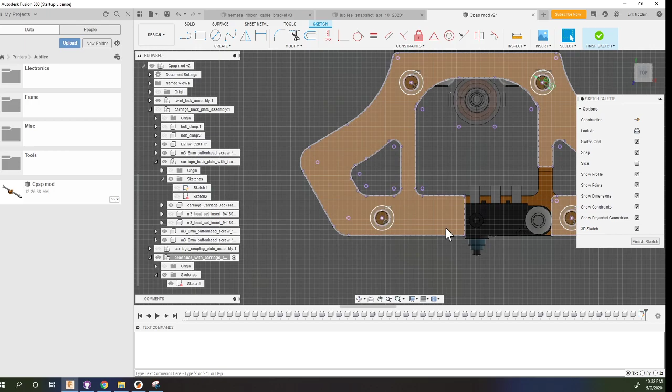Okay. Going to modify Carriage here for heat set inserts. It'll make iterating on this design in the future easier and quicker, since we won't be threading into plastic anymore.

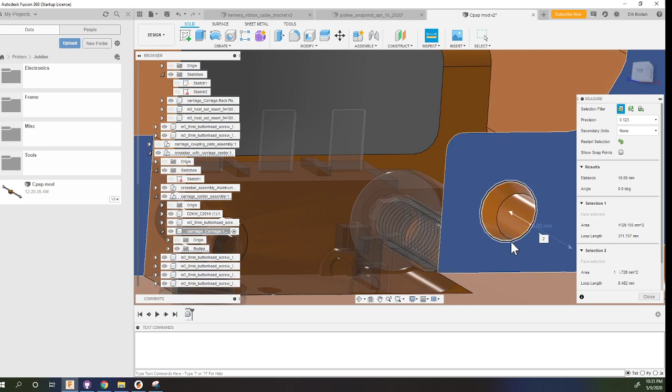I need to quickly locate my calipers. Alright, 3.8. So why don't we make it 4.5? What the heck? Ten millimeters.

You know what? Just for giggles, let's try something different.

Hello, I'm back. Welcome back to this week's tutorial on how to suck at Fusion 360. Oh, well, all right then. I'm just kidding. Yeah. Oh. Okay. Anywho. Oh. Okay. A bunch of them coming out now. So apparently somebody woke up and decided they wanted to come out.

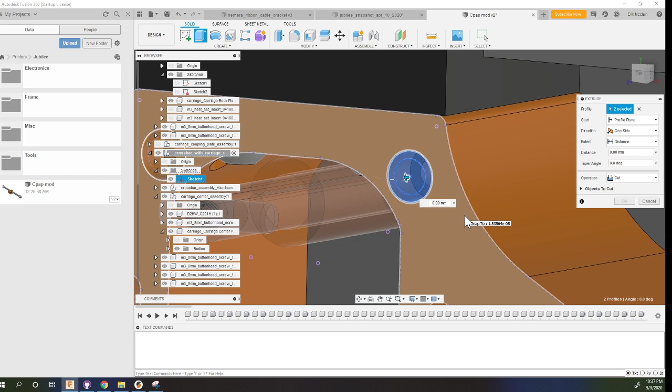All right. I am getting ready to wire up Hemera number 2 into the tool mount. But

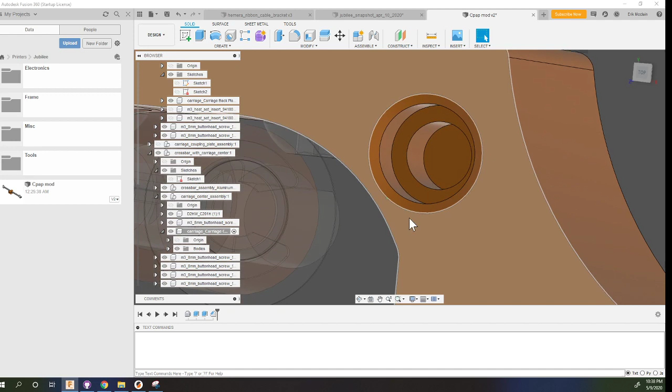Level. Okay. Okay. Okay. This thing wired up. Hmm. Oh well.

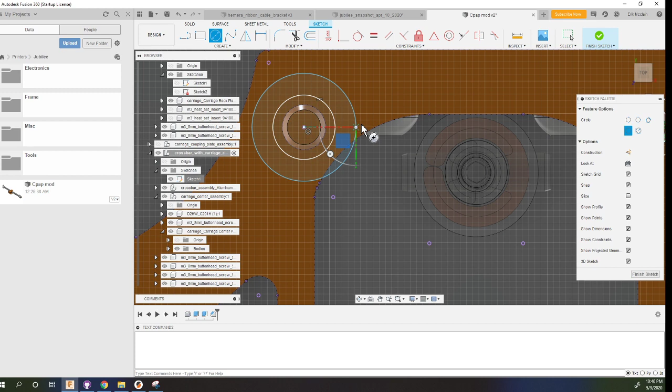Really, Decker? You know where I'm at. You were just here.

I need to make this a little bit thicker. Maybe, maybe not. We'll find out. Either that or I have to get shorter screws. What?

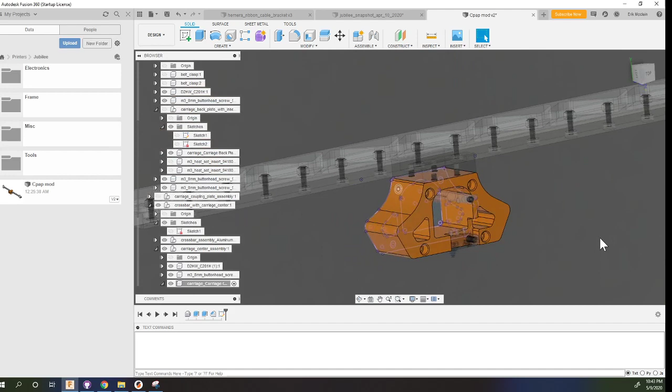So I've adjusted it so that it takes the nylon tie wrap. And I'll throw a picture in real quick just so you can see what I'm talking about. Well, I think I got it from your old one, and I did just an extension straight off the thing, and I put some insets into it for tie wraps. You'd also posted another picture of it a day or so ago. Yeah, I've been iterating. You don't need to post a picture. It was just a curiosity question. You're continuing to iterate that.

That's what I thought. But I've also had a successful installation of an RJ45 adapter to the toolboard distribution. And I have a functioning toolboard attached to it. So toolboard's already set up, configured, ready to go, and I'm currently wiring up the Hemera. So before I wired up, I wanted to get a toolboard adapter plate that was going to operate properly.

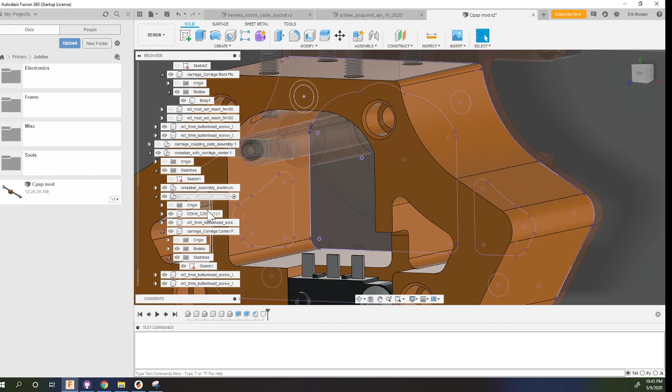And like I said, I'm using the 36-inch long nylon tie wraps that you can get at Home Depot. Yeah, that's what I was using as well, because they do a good job of being flat. They do a good job of flexing the right way and resisting flexing sideways. And they seem to work really well. They're ones that are for like air conditioning ducts. Yep, but they've still got enough side to side that you can move over the working area. So yeah, that's what I've got in all of mine.

And I saw what you were doing in some places to tie it down, and what I've ended up doing, which may or may not be where you want to go in the long run, I've just done this in a couple of places, is I have boxes of servo mounting screws because I do a bunch of radio control stuff, and I rarely use the screws. And so I drilled a hole through the strap and the thing behind it and stuck one servo screw in it.

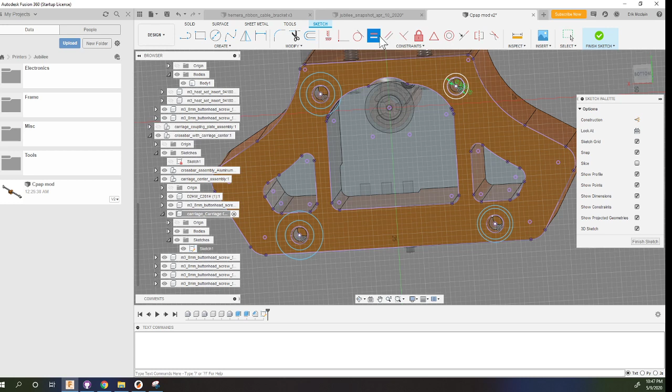Yeah, what I've done in the latest edition, hopefully I didn't get that too far off. Okay. Now I can actually move forward without using the drill anymore. So I set up a set of holes in the adapter plate, and then I went to the clearance hole size on the nylon strap, and then I put a set of screws in that go through and thread into the back of the plate. So you're not threading the nylon strap. Right.

And mostly because I wanted to be able to remove it without having to mess with it. Yeah, and you know what I did is kind of a quick and dirty version of what you're talking about, because I drilled a constant size hole through both of them. But it is true that almost all those servo screws are not threaded right up around the head, and they are threaded down at the tip, and so it kind of works out to be the same. There's no threads biting the strap.

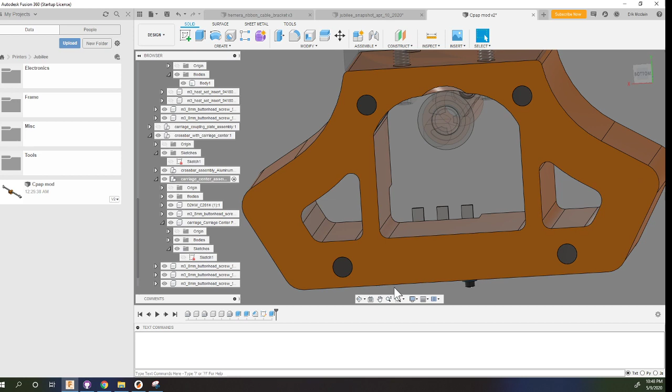Yeah, and like I said, it's not a long term. It's just kind of a quick and dirty. If we're going to design it in, it can be improved a little. But I will say it is extremely effective. So designing something in seems worthwhile. Yeah, and I think the most recent iteration, I'm going to need to add another millimeter of thickness to it, perhaps.

But... dropped the wrench again.

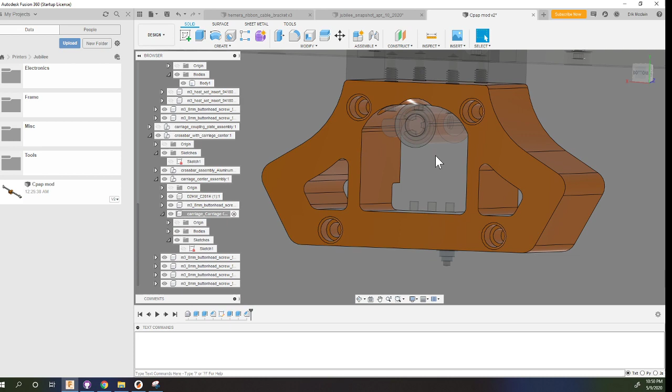And if you look closely at the picture, you can see that I'm using a full pair, wire 1-2 and wire 7-8 as the hot and ground, or the positive and negative DC power, which ultimately ends up effectively being the heater and the rest of its trivia. Yeah, and so by pairing those, you've got plenty. In other words, you're kind of using those RJ45s the same way people are using CAN boards. Yep. That's very elegant, especially with a flex cable in there. That's really quite good, actually.

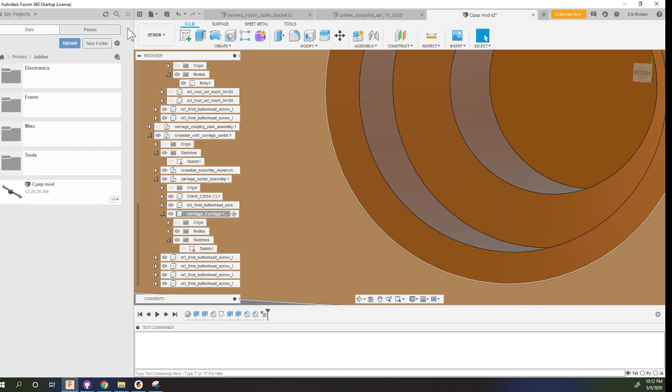And I've got color-coded cables. But I'm gonna probably sleeve. I may not have to sleeve them, because that's the only wire that goes between that and the tool board. I've got some smaller breakout PCBs. The second picture shows another one that goes off to the tool board, and as far as the Jubilee is concerned, that tool board is ready to go, configured. I just have to wire it up. Of course, I don't have another 12-volt blower fan, so that's on order.

Yeah, I actually found a couple in a box when I was reorganizing some stuff and went, oh, look! I was quite excited, I went, oh, I know where these are going to go. Yeah, that looks really nice. I found the pictures a minute ago, and that works out quite elegantly.

And then the latest one I just picked, I'm just test fitting that, but that strap is there now. And it's got two screws on it. Like I said, I need to thicken it up a little bit, but because the screws go all the way through, I could stick a nut on the back if I was concerned about it. Are they going into plastic or heat sets? They're going into plastic. Okay.

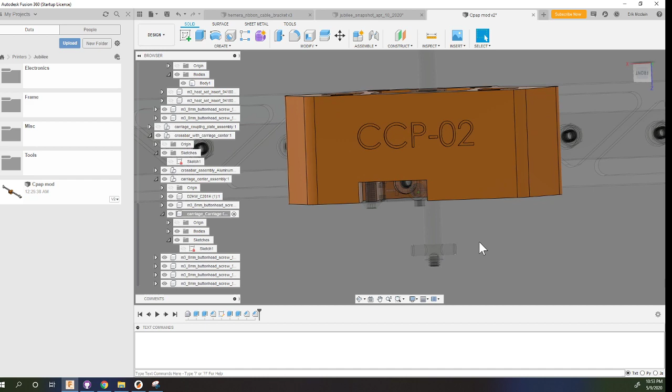Let me give you a cross section on it, just to give you an idea. Yeah, that's fine. A lot of these questions are curiosity. Oh no, I know, this is part of the collaborative process. I am trying to get a cross section. It doesn't want to stand up. There we go. How's that? Yeah, that's fantastic.

So the screws, I don't remember if they're M5s, M6s or M8s. I think they're 6 millimeters. Yeah, they look like 6s. So between the previous version and this version, I like this version better because it's actually smaller and lighter. Yeah, and it is looking pretty nice, it's getting there. Like I say, I just grafted a thing on top to get going, but I'll probably reprint with this.

I've already swapped mine out a couple of times, and it's not that hard to undo everything and swap out that plate. I'm just trying to get the tool board on the plate and get the hot end on the plate so that once it's there, then I can get my wire lengths somewhat close. And I think I'm probably not too far off from having a process that means I can build a tool pretty quickly.

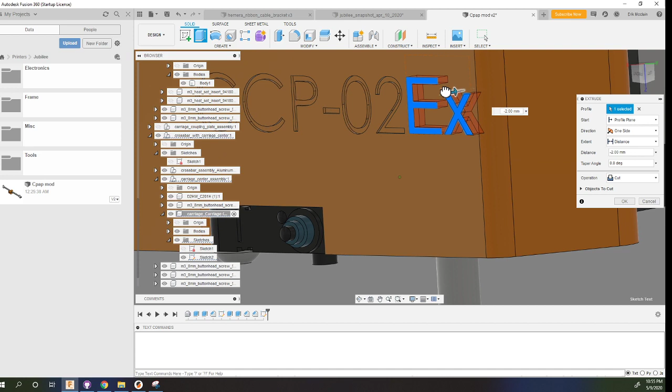You know, it is interesting having the tool board mounted on kind of sort of the top back, or instead of using the words front and back, the kinematic locking side of the whole thing. That does mean it's pointed into the body of the printer, and when another tool passes nearby, you have a collision, say, between a BMG that was done without a tool board and one of these, you actually can hit the tool board. Now, I haven't damaged anything yet. If you drive a tool into the back of another tool, essentially, into the lock side of the tool.

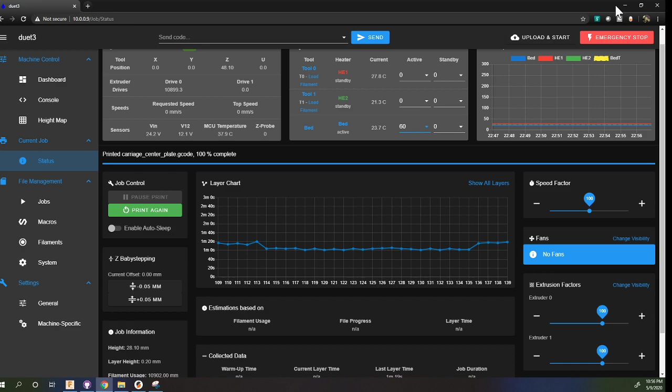So I've been playing around with what we discussed of having the axis limits set one way via the tool macros when you're parking and unparking, and have them set another way to help avoid that whole thing, so the tool macros can at the correct points set it this way, set it back the other way, etc. I made an interesting discovery that makes sense in retrospect, but I just didn't realize it. Axis limits are in machine coordinates, not offsets.

Yes. So your tool macros might or might not contain G53s, and they might do other things. But the Y limit that you put in the axis limit looks really odd as compared to everything else you're doing because it's in machine. And again, I understand why. It's the way it works, and it's appropriate. But that's part of the way I crammed some stuff together, was working all that out. I got it. Okay.

So the other thing, oh great. Okay. Well, that was an interesting discovery. I'm going to need to move one of the screws because the way it's set up is you have to put the strap on before you put the tool board on. Oh yeah, because the screw is in the wrong spot. It's below. It's inaccessible when it's all mounted. The bottom one. Yeah, it's okay. Not necessarily a bad thing.

No, in fact, I was sort of wondering, looking at some of your other pictures, if you could run one screw that you could get to and kind of make a chamber down at the bottom for the tip of the nylon strap to plug into. Yeah, I've actually had somewhat success in that area, and that turned out to be mostly because I was running into issues with bridging and causing troubles that way. So sometimes it works and sometimes it doesn't.

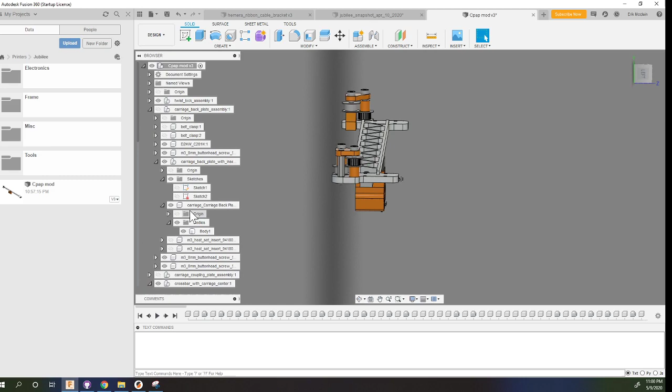And then the upper two holes, there's the middle hole. The middle hole of the starfish guide goes into the top hole on the Hemera mount. Yeah, because I've got a triangular. I figured the triangular would give you some flexibility, right?

So the middle hole of the adapter plate goes into the top hole of the Hemera mount, and then the bottom two go all the way through the standoff and then into the heat set inserts. So the Hemera mount has 3 more heat set inserts at the top in a triangular pattern.

I'm gonna try to stop dropping. Every time I try to pick it up, I drop the Allen wrench, and it doesn't hit the table. It goes all the way to the floor. Oh yeah, they're very good at that. Allen wrenches are quite talented. Yeah. So how was your day?

My day was actually one of the best I've had in a long time. I have an aircraft that I own grounded due to a cracked canopy, and I have just absolutely not been able to get to it to fix it for weeks and weeks. And I spent most of the day with that canopy and a padded jig, very carefully trimming it to the final position, and I believe it's ready to glue into place tomorrow.

So now it is about 2/3 masked off for the trimmer, and I ran out of daylight and patience at about the same time, so that's fine. I can finish the masking in the morning. That is a very finicky, meticulous part of that. Oh yeah, if you want it to look good. Of course. And so, like I say, I've been putting that off to do other people's aircraft and the day job and keep the family happy and all of those kind of things. And so it was very luxurious to do. Sounds like a win for the day.

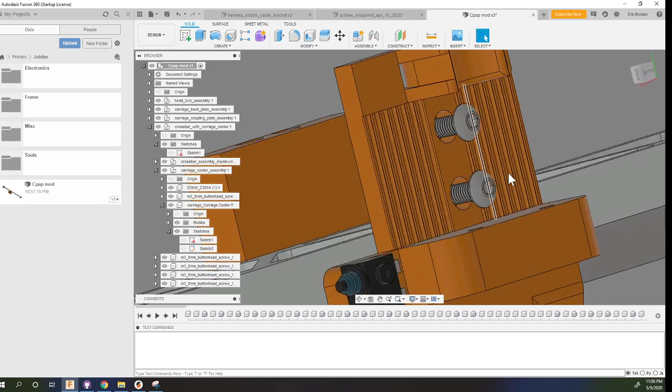And I kept challenging myself on how much current we're actually going to get on the tool board power leads. Yeah, a 40-watt heater plus some other trivial uses, and if you're running 24 volts, a 40-watt heater is 1.4 amps, something like that. Yeah, somewhere in that ballpark anyway. And so if you're super conservative and you double everything, that's still well within what you're doing with those pairs. Especially over those short distances.

The really amazing thing to me is if you look up those tables and then you actually do the math for 2 meters or 1 meter instead of, you know, those tables assume thousands of feet and their general recommendations. And if you truly do the math, it's amazing what you can do. Well, for example, if you go to the McMaster-Carr site and you look at the ratings for their 7-strand 300 volt 24 gauge wire, it's listed at 7 amps.

Yeah, exactly. And you calculate IR voltage drop over a meter, and you go, oh, well, okay. That's easy. And what kind of heating are you going to get? And they're basing it on 86 degrees and things like that. It's like, all right, not a big deal. We're good. So I'm not worried about overcurrent in the Ethernet cable. And if it starts to show some wear or breakdown, or higher resistance, you can replace the 88 cent cable. That's an assembly that's already made up by somebody else. Yeah.

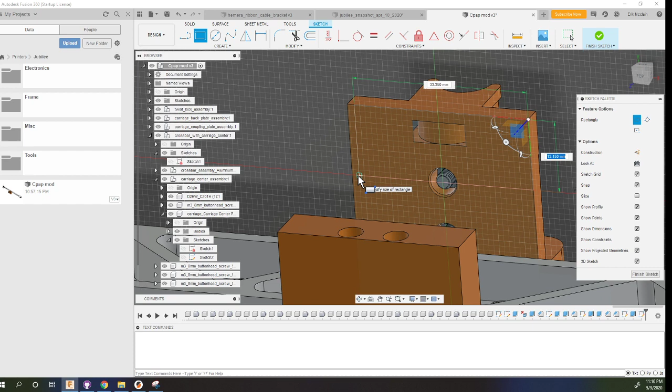Hey, gentlemen. Hey. Oh, quick, we gotta go. Yep. Run. Hi, Steve. How are you? Oh, tired. Didn't get to build as much on the printer today as I wanted. Just looked at a couple of the parts that I had printed and didn't like their quality, so I reprinted them. One of those things where I'm like, well, I'm going to have to redo it, so why not do it better? One of these things is not like the other.

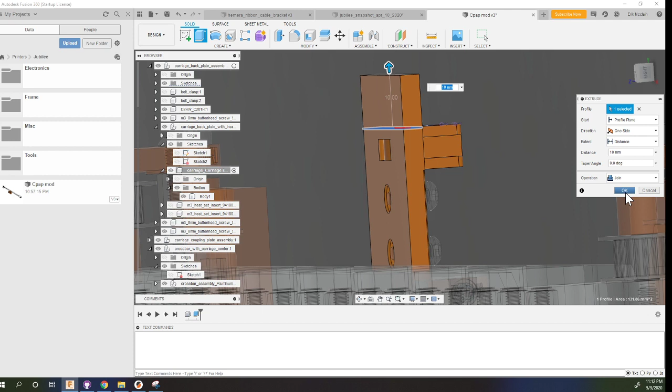By the way, any idea why Josh made, on the new motor plates, the LMS 04 and RMS 04, that hole conical? Are you talking about holes where the heat sets go, or something else? Yeah, there's a heat set that's on one side, and then there's a set screw that goes on the other. Right. Okay, so he made it conical so that it's easier to clean out the push-through plastic.

Okay, I am missing a screw from my Hemera. Are you missing one of the square nuts? Is it anything else you can replace? Yeah, no, and square nuts I have because I've got a bag of 100. The ones that I have in a bag of 100 don't fit. The ones on the Hemeras are very thin. The ones I bought were thick. Thin nuts.

I don't know if I'm missing it or they just changed which screw was provided. It's the screw for the heater clamp, and I think they just changed the screw that was provided. Heater clamp. Yes, got it. It would be a black oxide. Yeah, the last Hemera I had was a stainless. This one's not, they switched, or at least the ones I have. In fact, I have a kit from a Hemera dumped on the table right next to me, and it's black oxide mushroom head. Button head, yeah. Thank you. And that's what I've got. So I'm good. And I think that may have varied over time, because I've got some fairly early ones and they have black oxide.

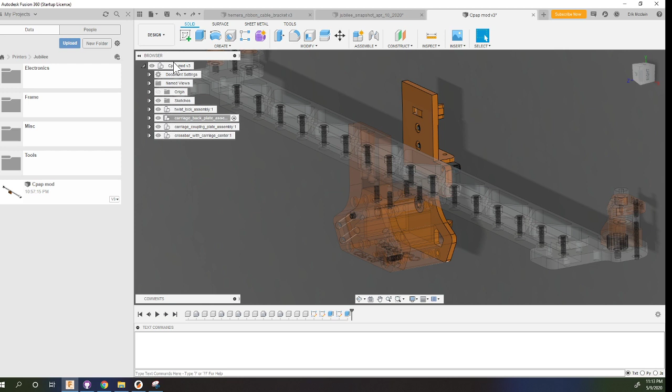So I did make an initial run of TAMV earlier today. And I identified, not a problem, just it couldn't find the circle. And it couldn't find the circle because of, and I don't know if this is the reason or not, but this is what I'm going to assume the reason is: my nozzle wasn't completely empty. The picture was clear and focused, and the bottom of the nozzle was dead nuts in focus, right? At least according to my eyes. Let's put it that way.

But what I saw is that it's like no circle found. It's like, what do you mean no circle found? It's right there. And then I look at it again, and it's like, oh, I've got yellow filament that's clean but flushed in the nozzle. So it's not a black hole. So I need to heat it up and then do a retract on it.

Well, I was going to say, heat it up, rub it with a paper towel while it's hot, in addition to retracting it. I will be the first one to say that the circle recognizer is a little bit finicky, and it sounds like kind of a pain in the butt to clean the nozzles and get the lighting and do this and do that. Yeah, but you only do it every so often, right? Right. You do it very infrequently, and it works so well. Well worth the effort. It is just astonishing.

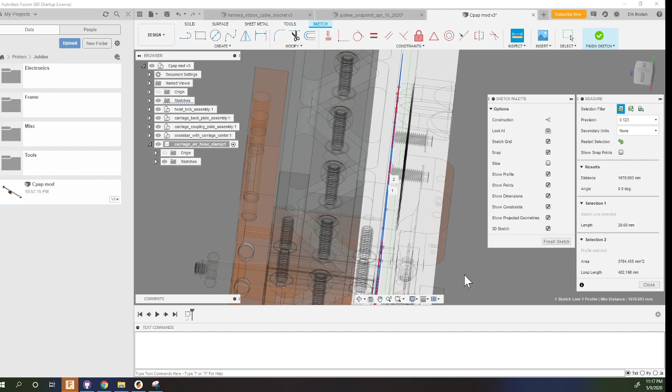Thanks, Phil. No, this is one where it was shipped from Amazon completely assembled. But Amazon just threw it in a box, threw about 6 feet of brown paper on top of it, and shipped it. And in the box was another Ender 3 Pro, in its original packaging. You saw how mine was. Go ahead and put it together. I think you might be surprised on how well it went.

I haven't. I was going to, but then Lauren was like, "No, you've spent enough time on the Ender already. You want to work on your Jubilee? Why don't you work on your Jubilee?" So I'm like, "Yeah, that makes sense." You haven't spent enough time with me.

The one Ender 3 is pretty damn good. I will say this: I know what that person was fighting, and if I didn't know as much of what I was doing as I do, for somebody who's new, it would have been infuriating. Yeah, some of them can be very frustrating. Basically, the bed is slightly tacoed, right? It's lower in the middle and higher on the sides. Which is the exact opposite of Ohio.

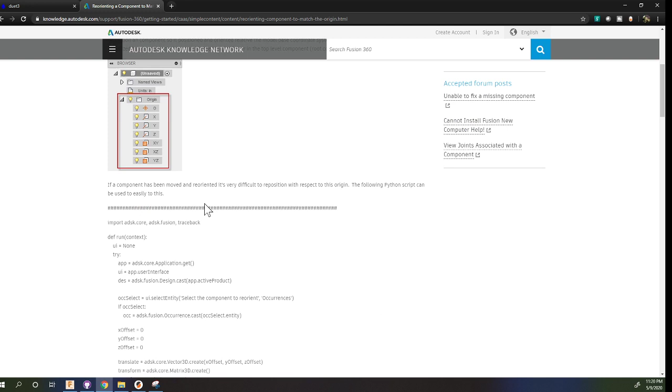Robotics and all those guys, it's heavy. Because they don't actually replace your bed. What they do is they add a bar that crosses two of the mount points of the plate, and then you've basically just got a screw that you're moving up and down on the assembly on that side. So you're not really decoupling anything. That is the downside to their design, because you've really just bolted something on to 2 other screws, and you're now adjusting them with a single thing. But since it can pivot on that center point, it does make leveling a lot easier. Well, you're doing 3-point leveling, so that's a thing. Woo, got the screws in.

That's a pain. I just wish any printer that somebody bothers to make where you don't have auto bed leveling, they need to take one of 2 approaches. You go the route that Prusa went with the Mark III, and that is you bolt the damn thing down, right?

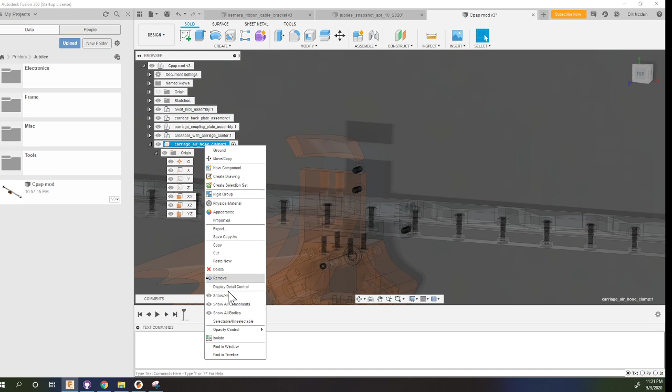You put 9 bolts in it and you bolt it to something heavier than the plate is. Ta-da, done. You've minimized warp, right? Yep. And then in the Prusa case, it works really well because, hey, bed leveling, and not just bed leveling, but skew detection and all the other stuff they've got going on. So that's great, right? Or you go dead nuts simple and say, oh, look, 3 points describes a plane. Oh, hey, 3-point leveling, done.

Like, apparently not in some people's head. It is astonishing how many people think 4 points. Oh yeah, I've had so many people be like, oh yeah, I had this printer and it had this crappy 3-point leveling thing, and I'm like, no, that's the way it's supposed to be. Yeah, that's the easier way. Yeah, exactly. I mean, that's the good way. But lots and lots of people look at that and go, no, whatever.

Toolboard, wiring diagram. Thank you very much. Open it up. So, and I was correct. Josh has not published the assembly plans yet for the corner double pulley plates for the metal plates. Okay. But in the conversation I've had with him, he said basically it's the same exact instructions as the regular double corner pulley plates, with the new metal plates and the longer screws. Right. And so I asked him, is the pulley assembly the same, and it's just the bolts that go through the plates that are longer? And he said yes.

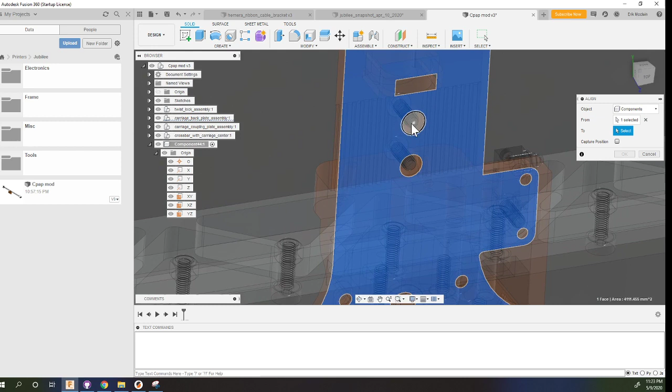So I'm getting the bolt length off of him now, and that will let me actually start assembling them. So when you say it's the same, are you referring to the stack up of all the shims and everything? Yeah, the stack up of all the shims and all that stuff are the same. Yeah, I had seen some reference to that. I have some metal plates sitting here. I haven't put them in yet. But I was planning on putting them on and then playing around with shims. In the long run, it's better to have a guide and get it exact. Yeah. But you can also sight down the belt inside and say, okay, that's going to work.

And then on the right motor plate, the L-shaped spacer that goes underneath. Yeah, that was required. My old ones didn't come out as good as the new ones that I just printed did, except for the little specks of black filament that I'm now getting in some of my prints, because there's black filament in the nozzle that isn't coming out, which is driving me crazy because I've run probably 3 hours of print through it.

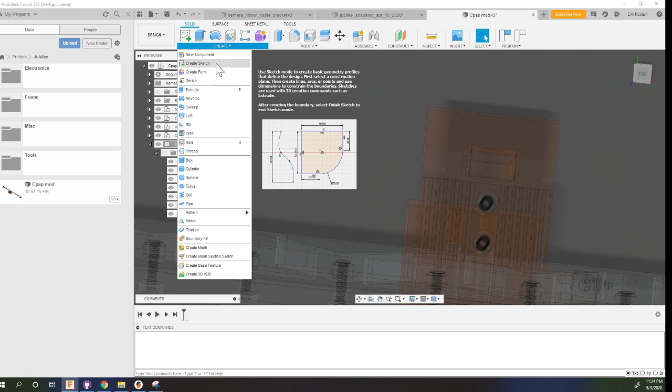Yeah, no, it'll come out for several months. You know, it generates it. It's cloning itself in there.

It's carbon. But the thing that is slightly annoying is he switched the switch on the right motor spacer. Remember in 1.0 he used one switch, then he switched it in 2.0, and now in this he switched it back to the original switch. Yeah, I think it was a sourcing issue. He's trying to get it where either one will work. Actually, his thing was that the old one wasn't thick enough. The plate had to be thicker, otherwise the switch had to be shorter. And so, since with the new motor plates that plate is thicker, he's like, now I can put the switch there and I can just use one switch.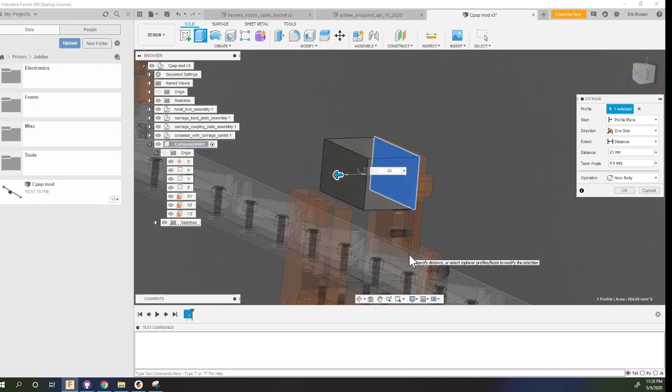Yeah. But it means that I have to go back and remake my cable assemblies. Yeah. My cable assemblies are a wreck until this thing is actually functioning, and then they get rebuilt. No, I'm serious. It's because we don't have actual wiring. The wiring harnesses and the guidance of the wiring that Josh provided doesn't work. If you looked at the back of my machine, I have that socket right next to the locking mechanism. So I've got a 6-pin connector that goes from where the locking mechanism is over to the carriage, and that's got my Y and my X end stops as well as my front carriage plate sensor.

What is Erik working on? He is working on an adjustment to. Actually, why don't I just shut up and let Erik tell us? I suddenly turned on the stream and I'm like, oh look, he's doing something in CAD. So I'm modifying these 3 plates. And what I want to do here is create a central cooling system.

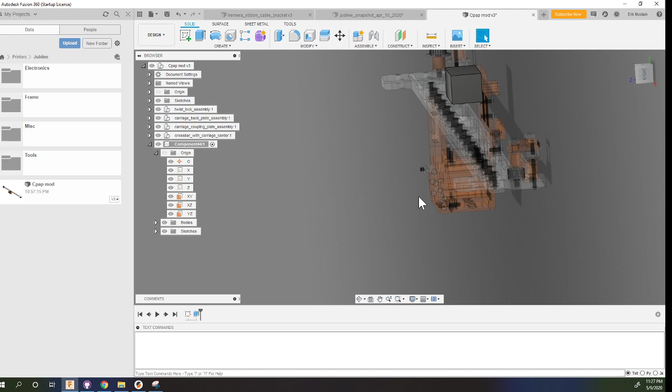So basically a CPAP hose will kind of plug in where you see the gray block. And then there'll be some sort of ducting that'll go along the plate on this side, and then that will connect up to the tools when you go to pick them up.

So basically what I'm trying to do right now, I really just want to rough out, like I want to try to get the back and front plate of the carriage assembly modified. Yeah. To an extent that I won't have to change it again when I go to finalize the CPAP stuff. So right now I'm just going to try to rough out how the CPAP stuff's going to come in.

And then I'm trying to make it so that the guys that put the electronics boards on the back aren't going to hate me if they want to modify this, namely Brian. Or want to change theirs to this. So I have to change my carriage around because... Oh, really? Huh? Well, you're gonna have to add room in, right?

Well, no. Basically, all I've really done here is I've extended this plate up, and I've extended this plate up, and this is just kind of here. So this is just kind of temporary. I haven't finalized anything, but basically I move this up, and eventually this is going to bolt together so that it'll be attached on the top and the bottom, and then that should make these plates more rigid. And I think that'll be better for the machine anyway.

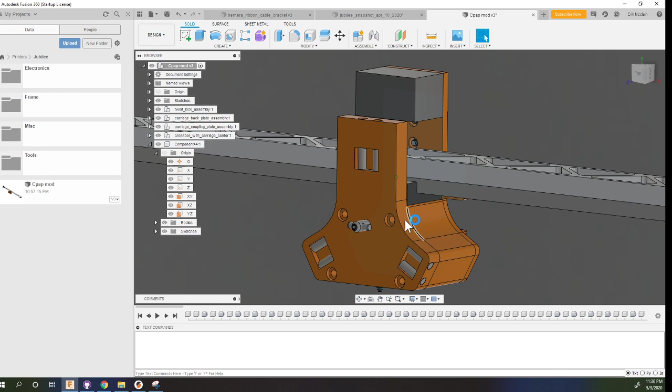But that's just me. So where's your air passage gonna be? Is kind of my question. Well, so the hose is gonna come in here, and then there'll be some sort of chamber, and then the chambers will probably come down here on the sides of the plate, as low as I can get them, and then connect up to something on the tools. I don't know at the moment because I'm still working that out.

My thought was, if you come out the side, basically, and build a chamber that goes down to where the tool lock is, you can literally just put a hole in the plate near the tool changer. Below it. And below the twist lock. Yeah, some of that is stuff I've thought about, but there are some issues there. First off, you would have to make this all sealed somehow.

And then, Daniel, are you watching the stream right now? Did he disappear? Well, I don't know where his BL Touch comes through. Oh, yeah. I would like to make it so that he doesn't ruin his BL Touch, but yeah, if we use this as an air chamber, I might be able to section off the chamber so that... Right.

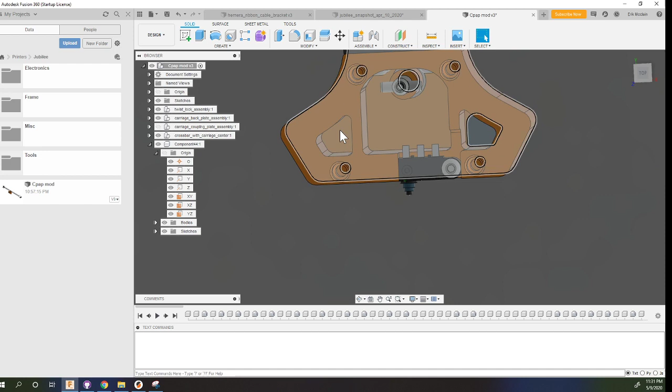Or you do it on the side. You do it on the wing where that hollow space is now. Right. Wiring runs through this side. Okay. And I don't want to make the air flow too small. Both sides, though, right? Right. So if I kind of hollowed this area out and made a wall, and then left the wires over here, and I think the BL Touch comes in on this side. Then I think we'll be okay, and we could do something like that.

That's part of the stuff that I'm not sure about right now. I still got to work that out, but I also did modify these for heat inserts because I hate disassembling and reassembling stuff when it's just screwed into the plastic. Yeah. And you're not wrong. Yeah, and since this is going to be the third time I've taken this apart, I'm not comfortable putting it back on.

I had fun taking the pulley spacers apart today for the motor plates, because when I took the pulleys off the assembly, I couldn't get them out because a little tiny bit of thread locker had seeped in between the shaft of the bolt and the pulley. So it was affixed to the bolt.

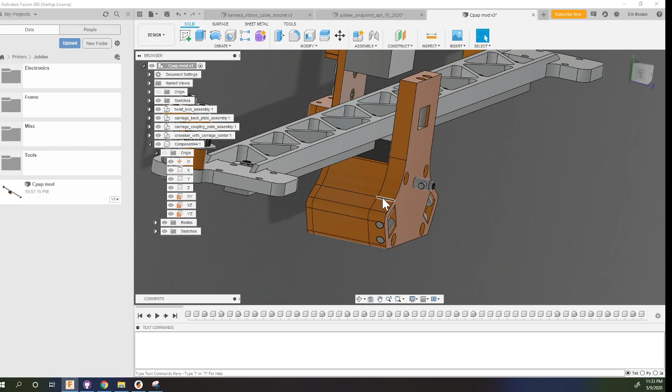Oh, yeah, this is why we can't come out, because of the rods here. So we would have to make the chamber over here. And one thing I'm worried about is if we have the air going this way, then this way, then this way, and all these different ways, I'm not sure how much that's going to kill our airflow. Yeah. Every time you change direction, you're going to lose. Exactly. So I wanted to try to make these transitions kind of smooth through here, so it kind of flowed around here without having to actually redirect the air. You know what I mean?

Yeah. And I still don't know about around the outside edges. Huh? You were talking about dropping it over and down. Yeah, basically it would come out and then come down the plate. Yeah. Actually, just make it come out the top. Right? So extend the cup. Remember that's where the front of the tool, that's the plate where the tool board is. Oh. It narrows the build by doing it in that fashion.

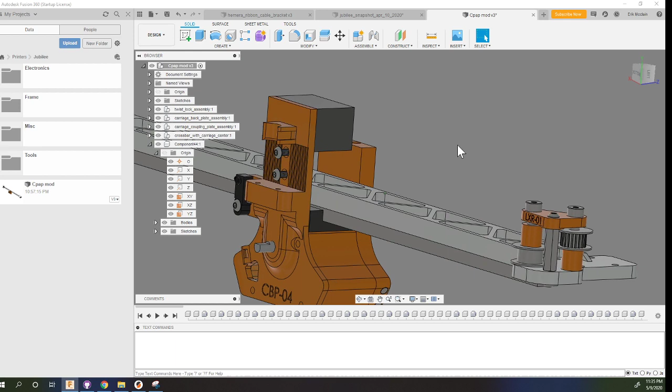Yeah, there's significant challenges in where this stuff is going to go, but if I could somehow get the air down underneath the tool locking mechanism, it'll be right in about the right spot to come out around the nozzle. Well, couldn't you take it out the back? So flip it around to the back side. Over here? No, the complete back side. Take it through on that side. What's the back side? Similar to before how we were talking. So bring it down along, oh, you got the belts in the way then. Yeah, exactly. The only place to come down is going to be right here. Yeah.

Unless, and I don't think we can make the carriage too much wider, because if we made it any wider, then we would be hitting the frame potentially. Well, the only thing I was going to say is you could thicken that back plate where the tool change lock is. If I have to. I'm hoping to leave all the existing geometries alone, but it doesn't leave me a lot of space. Yeah, but it's not going to be structural, right? So I can make it really thin right there. Yeah.

I know you're using a CPAP for high flow, right? Well, I don't have a CPAP blower. I have a 120 millimeter radial blower that I'm going to be using. Okay. Someday I would like to use a CPAP blower, but they're very hard to get a hold of, especially right now. My thought was, couldn't you just go for higher pressure air and then give it an expansion chamber? Well, I don't want to run a thin air tube or use an air compressor, and I don't like aquarium pumps. Aquarium pumps don't really provide much airflow. They're not designed for high flow.

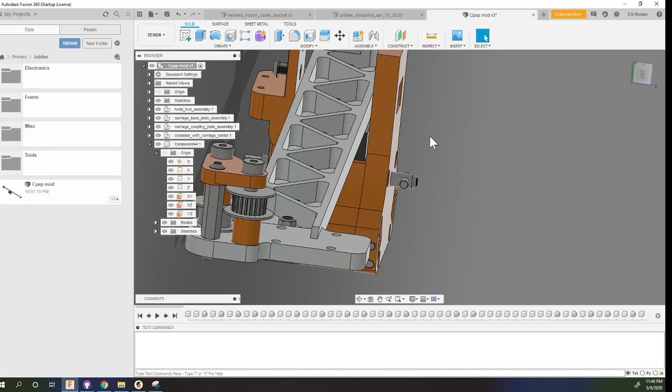Who knows? I might actually have something turning here in just a few minutes. All right, I know I brought it out here. Oh, there it is.

It's like, just be wealthy enough to have full sets of tools. Yeah, exactly. I mean, I wouldn't trade my setup here for the world. When we bought this house, I went for it because of certain things, and my wife largely went for it because of this room that has huge windows that overlook the tops of trees, because the house is a 3-story on a ridge line. Yeah. And one of the things we never anticipated was what we now call the bird show.

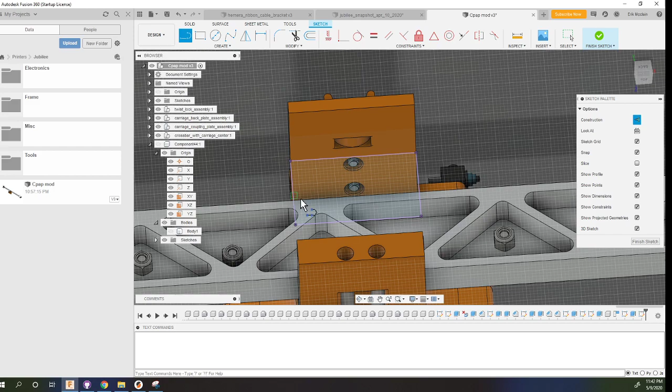We sit in that room and drink coffee, and we're about a mile from a reservoir. We're by no stretch of the imagination on the lake, but we're only about a mile away. And so you get a variety of birds from the trees, from the lake, from this, from that, just every kind of bird in the world. And because we're on the ridge line, they fly right at the windows and then go over our house. Oh, that's cool. Oh, it's amazing. And like I say, I wouldn't trade this place for the world. Every place has its pluses and minuses, but I wouldn't give up the bird show thing.

Yeah, I watch a lot of birds as well. I live on wetlands, and my backyard actually is on Broad Creek here in Norfolk. It says it's a creek, but it's close to 100 yards wide. And it's a tidal creek, so twice a day I'm in mud flats. Which just gives you even more wildlife diversity. That's pretty cool for your bird show. Yeah, I have a lot of wildlife in the backyard. The backyard's not huge, but it's big enough. I had a bald eagle out there, egrets, ducks and geese, of course.

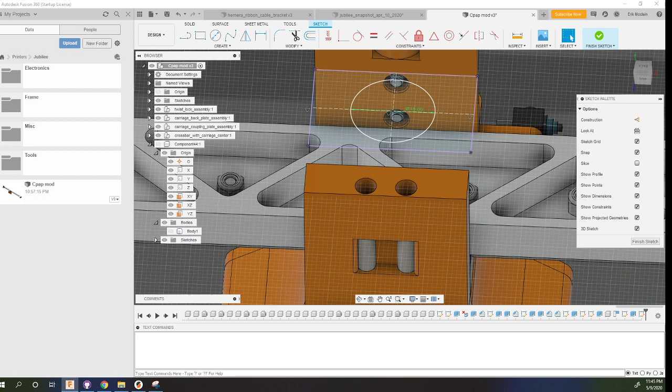I am not much of a bird expert, but I swear the smaller they are, the more territorial they are. Oh yeah, well these guys are not small. Well, but smaller than the eagle. Not by a whole lot. Yeah, there are some big healthy grackles around here. I know what you mean.

I got it. Like I finished crimping the wire and I go to open my tool back up and it's like it's not moving. Why is it not closed? I hit the lock while I was closing it. Oh, yeah, that won't move at all. It's like, why is this not moving? Oh, doggone it. Well, all right, fine.

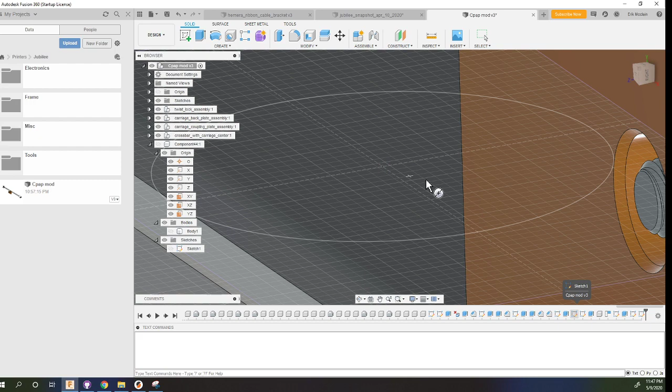Crimping the insulation and it slipped, so I didn't get a good crimp on it. I got an okay crimp on it, something I can make work. Worst case, I'll cut it off and put it in there again.

No, I'm looking forward to having... One of the things I guess this is: will TAMV do your first tool offset? Yeah. Okay, good, because that is a concern that I had because my tool offset I know is not 100%. So, the tool offsets have to be good enough that when you switch tools, the second through nth tool will end up over the camera. Okay. Other than that, they don't have to be anything in particular.

The first time you run it, you can run it with no arguments, and it will prompt you to jog the first tool over the camera. You just mount it manually and jog it around until it's over the camera, and then you press enter or control C or something that says on the screen, and it'll take it from there. Now, in the future, if you want to rerun it, you have the option of specifying a command line argument that has an XY coordinate. And if you do that, it skips that jogging step and just mounts the first tool and puts it over that XY, and that does need to end up over the camera.

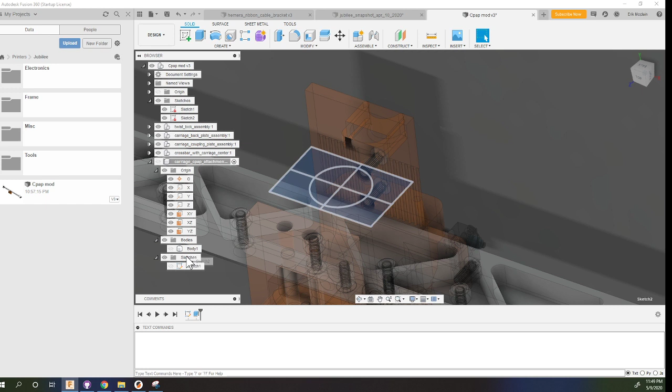Okay. But if you run it with no arguments, it'll let you put the first one. And at the end, in addition to telling you the G10s, it'll tell you the command line XY to use next time. Okay, cool. Assuming your camera's in the same place. Yeah, I'm using Eric's camera mount. Yeah, so that'd work fine.

The other thing is, if you're having trouble getting it to recognize circles, yeah, clean the nozzle and this and that. As strange as it sounds, jog up and down slightly in Z to blur the image. Take it just slightly above and just slightly below the focal point, and sometimes that'll cause it to pop into recognition. Weird. Yeah. Okay. Yeah, I mean, sounds good.

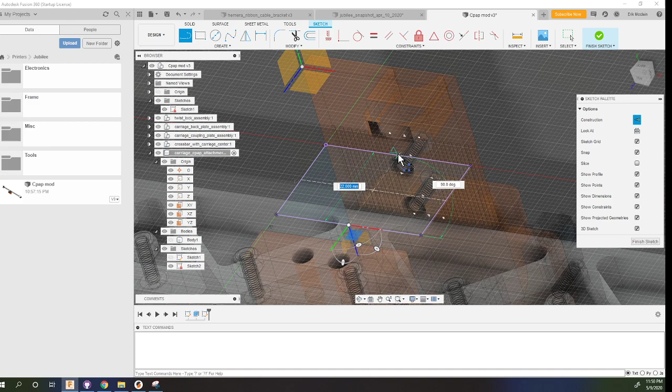And then are you using an LED ring of any kind? I'm assembling one tonight, or maybe tonight. I don't know. Depends on how much later. Yeah, I have kind of resisted those for a long time, and I finally caved in and said they're probably a really good idea. So there's all the commercial ones where I would describe it as a flat ring with the LEDs pointed up, and they work.

But I actually took all the flex strip stuff that has LEDs on it. Yeah, I saw your ring where you made a ring facing inward. It all points inward, and that seems to work really well. I don't know that the recognition algorithm does or doesn't see what our eye sees. Our eye sees a bunch of spikes pointing toward the circle on the conical part of the nozzle, and so I made it fairly big, and it seems to work really well. Yeah, I've got a 16 LED ring that drops right into this mount. And have you seen the mount that Eric has? Yeah, it looks pretty nice.

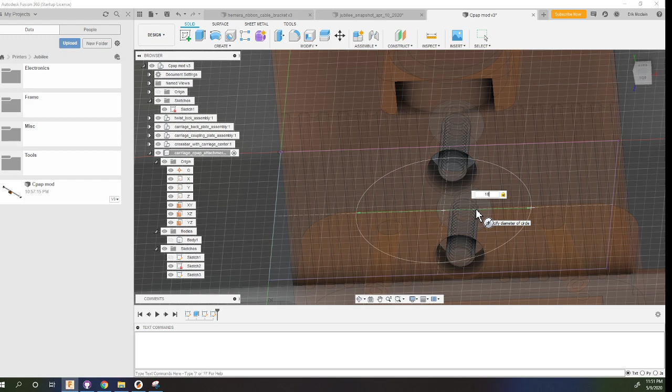Thing I was thinking is, hey guys, I'll be right back. I create a second mount. So instead of the bed plate mount, I create a second mount that camera can be pulled off and hung on. That becomes your observation camera when not in use for TAMV. Oh yeah. So the only thing is you'll have to screw the lens back and forth, which is no big deal. It's not super critical. You just have to set your focal length. Yeah, and just reach in with your finger.

I am almost... I do not have a part cooling fan at this point. I've been printing without one quite a bit, or a part nozzle or anything like that. So it's not ideal, but you can actually get some okay prints doing that. Yeah.

So where I am at the point now: well, I have a part cooling fan on order, I just don't have one that works right now. So this is not ideal, but what I need to do now is attach, put some strain relief on the wiring. So that's what I'm going to do next.

Come on. I'm just trying to figure out how to model this stupid coil. I've never done one before, but I think I've figured it out.

Yeah, come on. I'm fighting with the wiring, and it's just because I'm trying to put some strain relief on here. It's not going to be pretty because I'm gonna iterate the mount again, but I've got the wires hooked up. I do not have a part cooling fan wiring in here, but that's okay. All right, there we go. Let's snug those down. And because I have the nylocs, really?

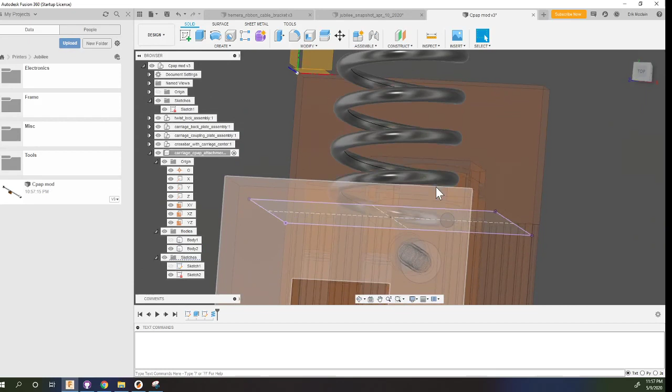Okay, so you're modeling the hose. Yeah, I need something that will work as a cutting body when I make the block, so I can clamp onto the hose nicely.

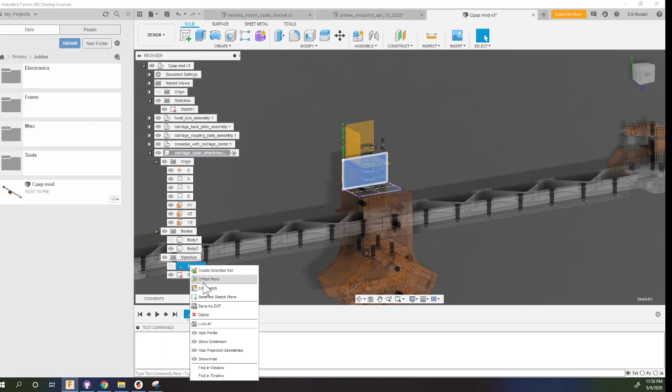I'm gonna print off a test block here. Except I realized that I probably should model an extra coil below so that my cutting body doesn't abruptly end where it is at the moment. There we go.

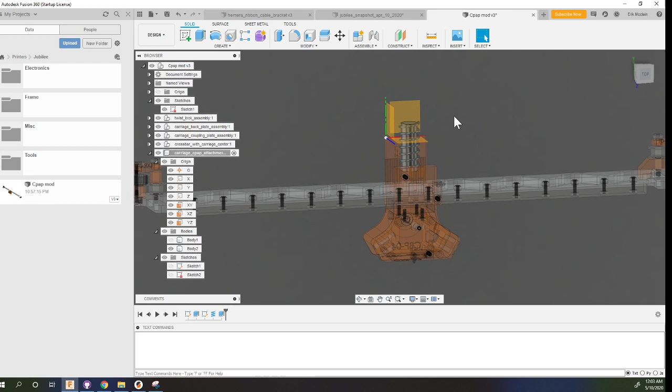Did it not go up? There it goes. There we go. That should serve as a cutting body. Okay. Where's that gone?

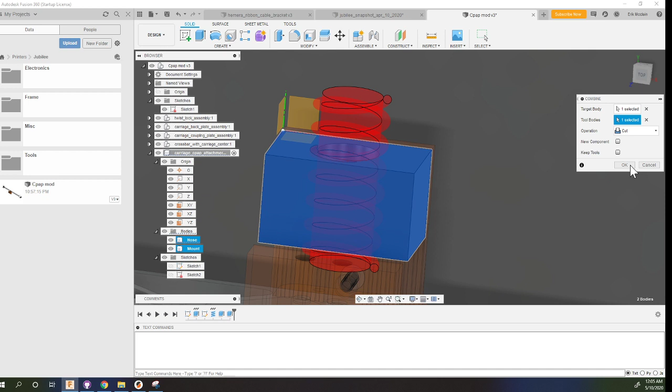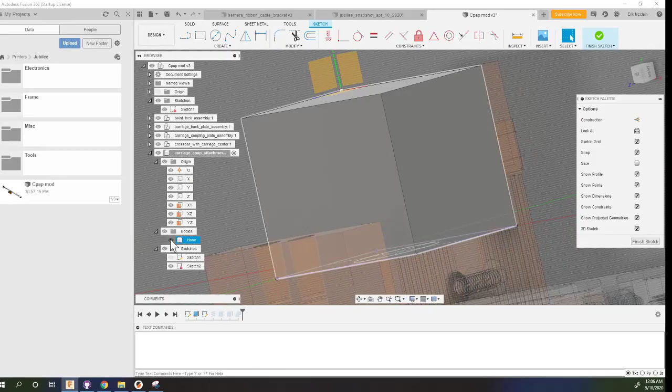Okay. Why is... That's not what I want. Hmm. All right, what have I done wrong here? All right.

Daniel, you back? Yeah. So on your second tool board, do you define the sensor as S1 again, or is it the next S in line? Good question. It would be, because I've got toolboard 20, tool 0. I've got toolboard 21, tool 1.

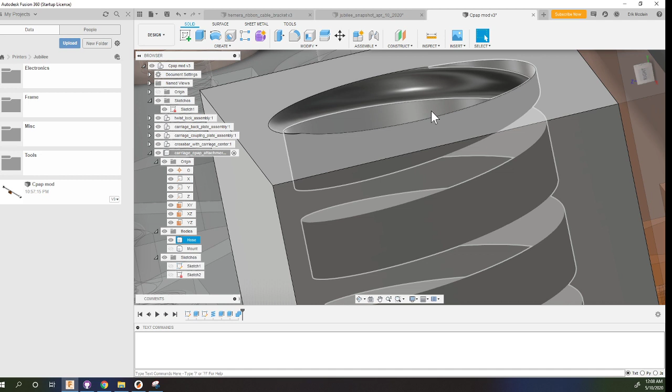All right, but your addressing should be 22.0 for everything on 22. Yeah, right. It's 21. It's 21.temp0, 21.out0, but it's S2, H2, F2. Correct. Yes, all that will need to be. I see what you're asking. Yes, you'll have to go to unique numbers on those. You'll have to increment them.

Okay, and then when I get to the tool number, it's P1 because that's the tool. S Tool 1 because that's just the human readable name. Right. And then D0, drive 0, because the drive number still is drive 0, right? Correct. Actually, your drive number, let me look at this before I say it out loud. Okay, because the drive 0 on toolboard 20 worked. Okay. Yeah.

And then I've got H2 F6, which is the fan 6. Yes. So mine ended up being, my first two are on an expansion, and my third one's on the toolboard, but the principle's the same. So, to your point, it's D0, D1, D2 working down the tools. H1, H2, H3, that kind of thing. So I do need a D1 on that? Yes. Because it's on a separate, it's still listed as drive 0, and I didn't get any errors in the...

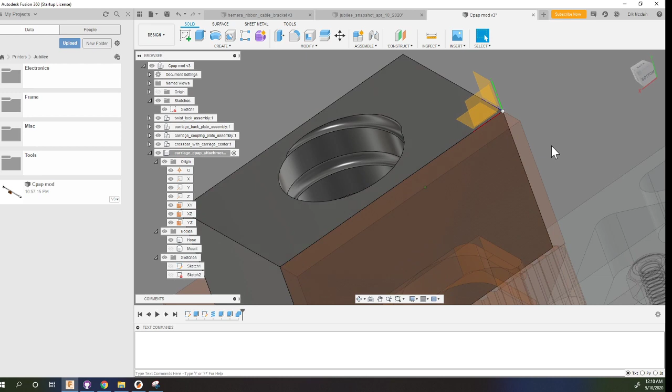So your address of the drive itself will be, and that's back on... So I'm looking at that, and I've got the M584 E21.0. Correct, yes. And you have 21.0, 22.0, etc. on the axis definition on the M584. Yeah, and then on my M569, I've got P21.0 S0. Right.

But on the tool definitions themselves, and here I can copy mine out and post them into live stream chat, because I can show you what I've got. I've got to check my wiring at this point, because it's saying my thermistor is reading at minus 570 or minus 273 or something. Okay, so we'll come back to the thermistor in a minute, but I just posted my tool definitions, and you can just see how they march down through there.

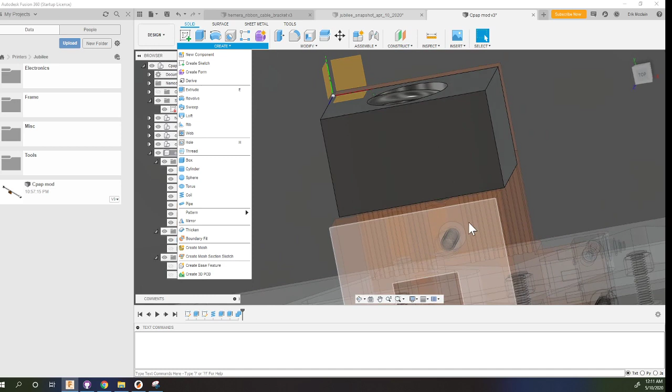P0, P1, P2, D0, D1, D2, H1 because the bed is H0, H1, H2, H3, F5, F6, F7. Yeah. So you can see how they just march down through there. Now, if we work backwards and we go up to the individual definitions of those axes or tools or fans or whatever, to your point, and you are correct, they'll have pin numbers of 20.0, 21.0, 22.0, things like that. Does that make sense? Okay. So I probably need to adjust that.

So how do I get it to give me a code listing? Do I do like triple quotes or something? Yeah, triple quote, code, triple quote. Triple little backtick, the thing to the left of the one on a US keyboard.

So I got my LDO Rails today. Yeah? What'd you think? They're better. They're much smoother rolling. I haven't had any problems with them so far. My guess is it's probably the same manufacturers, but LDO is doing quality control. Yeah, probably. Because everything looks identical.

Like the plastic that's used in the end caps, everything looks identical. What rails did you buy before? Because the Chinese rails that were on the BOM before are completely different than the LDO rails. No, the Chinese ones that I have look identical. Mine aren't even the same profile. Huh. I'll have to check it out. Some of them are kind of rough, some of them are okay, but they do look pretty much identical. I've got LDOs on the printer, and I've got a stack of Chinese ones in a box.

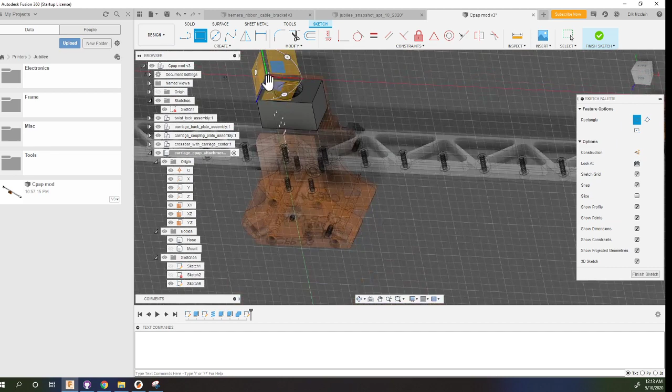I'm currently arguing with Shenzhen Fija Electronics Tech Company to replace the ones that they sent me that were the wrong length. Of course, I made the purchase in like December, and so they're like, well, you had 30 days, blah blah blah. I'm like, well, I also ordered these other rails from you and was waiting on those to arrive, so I didn't bother to open anything. You should be nice to a repeat customer who purchased over $100 worth of rails from you in the last year. Yeah. That's right.

All right. Clyde says my message could not be delivered because I don't share a server with the recipient, or you disabled direct messages on your shared server. Or blocked. Wow. So what's blocked? We ought to be on the Jubilee Discord server. I'm on here. I had messed up what I was posting, and then I tried to correct it too many times. And it's like, you're a bot. I'm not a bot, I just can't type. There we go.

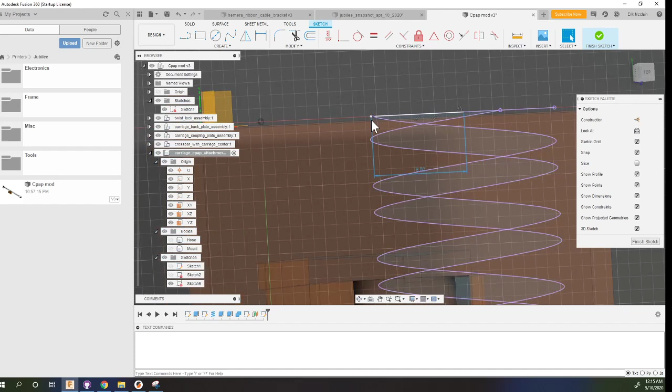All right, so that's my toolboard 0, and I'm able to print with that. Let me look at it. Yeah, I've got that, and this works. I've printed. Here's the M563. There it is. Yeah, that should all work. So your next one will just be M563 P1, D1, H2, F6. And then above that, you'll have all the definitions for everything set.

Yeah, I'm showing you what I've got. Like I said, I need to go back and check my wiring because for whatever reason... I've got it. All right, how do I send it now? Okay.

So I'm kind of befuddled by something that I figured all the Chinese knockoff manufacturers would fix. There's all the knockoff BMG extruders out there, right? And one of the downsides of the BMG extruder is if that top Bowden tube coupler ever breaks, and they've got little tiny thin metal teeth in them, and they do break, you basically have to throw the extruder out because you can't replace it.

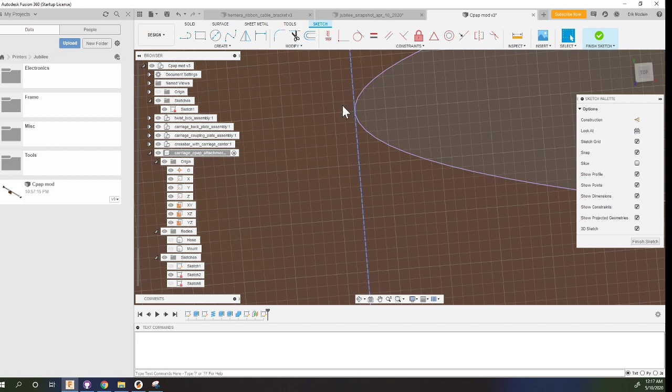Yeah, you can pull that whole thing out and replace it. How? I use a set of wire cutters and slide them under the edge of it and just lever and yank. Now, let me be sure we're talking about the same thing. Are we talking about the little movable part with the metal teeth in it? Yeah. There's the blue part, or the plastic part, and then there's usually a little metal piece.

Mine, the metal piece, is sunk all the way down flush with the surface. I know what you're talking about, and you're right, it is not replaceable. But the insert that goes in it, the thing that you push on to remove the tube, that's replaceable. So I'll have to see if I can pop that out and get that replaced on mine. But mine, the little metal teeth went missing.

Enough pressure built up when I was printing at a really high rate, and my nozzle and hot end couldn't keep up, and rather than strip the filament, it forced the tube out. Yeah, I've had that happen. So I'm sitting there and I hear a little ping, and I didn't realize what it was. I look over 5 minutes later, and there's this huge loop of filament just spooled in the air. Yep. You got it, man. I've seen that movie.

That's in fact where I commented. Somehow our printers know when we're doing COVID stuff, because after years of reliable work, one of mine tossed its Bowden tube in exactly the way you are describing, out of the blue. Yep. Oh, and we had fairly good news this week.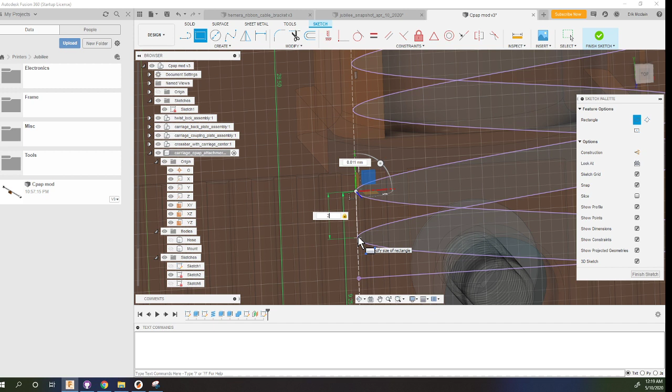So IC3D sent a thing out last night, around 6 or 7 o'clock, that they no longer need us to print stuff for COVID masks and face shields, because they worked out a deal with TS Tech, which is like one of the tech schools, and they also do manufacturing for Honda for automotive assemblies. TS Tech based a mold for injection molding off of the mask design, and they're now churning out around 1,200 a day. Oh, nice. We can't keep up with that.

They let us know that if we had anybody who still wanted the printed versions, they would still make quantities of elastic bands and the face shield parts available. Oh yeah. So I thought that was pretty cool. And we were part of the governor's presentation on Friday, evidently. Huh.

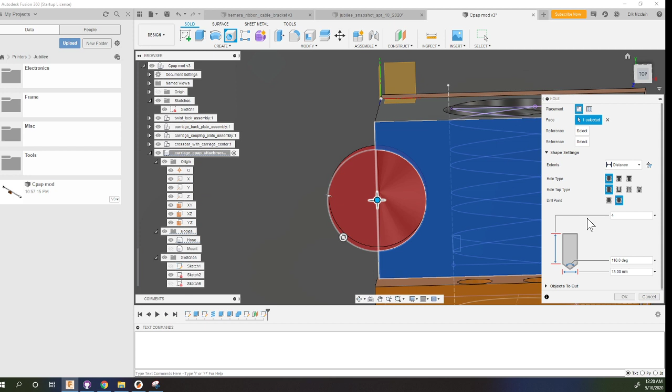You know, when you have two editor windows open, it's completely different commands. Okay, what have I done wrong? There we go. Now save that quickly before you screw the file up. I keep cutting and pasting these huge blocks when I'm trying to do one line. So what am I doing wrong here? Or I just have a bad thermistor.

S1 P20 temp 0. So what's it reading? Minus 273. That's actually usually indication of a wiring fault, an open circuit. It could be just a bad thermistor. If you have access to those pins easily, short across them, and it should change to 2000. Really? All right, let's find out. So it's saying it's an open right now. Yeah, open reads minus 273, and shorted reads 2000. So you can fool around with that to figure out where your problem is.

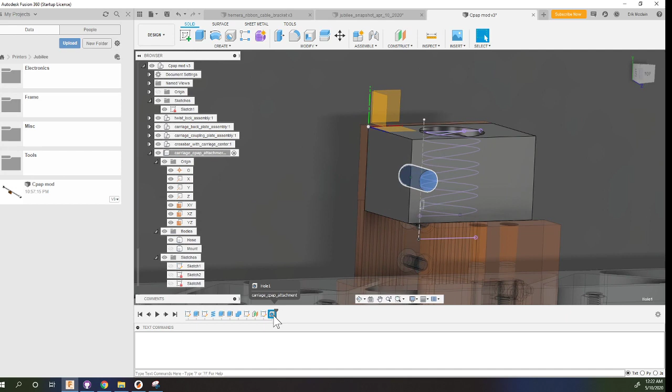I changed routers 2 days ago, and I'm still finding all the little tiny things I need to adjust in terms of static IP and stuff.

Nope. I shorted across the pins, and nothing changed. That might mean that you still don't have all the dots connected. Even though it normally means an open wire, it could also simply mean that you don't have all config dots connected yet. Yeah. I'm not sure.

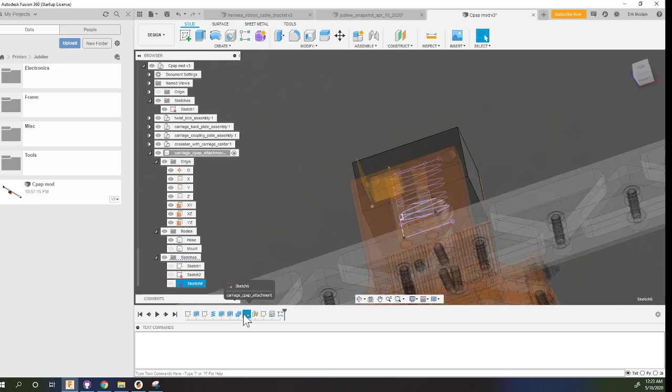I thought this thing forced its own static. I have a little box I've inserted in my internet link because I'm so dependent on it now that I'm working from home. I've switched routers, and the little thing is 99% working, but it does some extra testing to see how my Wi-Fi is doing. I think I didn't assign a static to it. Oh, no. There. Well, that command ought to do it.

And it's very possible that the cartridge, the thermistor cartridge, is just bad. I did not gronk on it. I just snugged it up, turned it ever so gently until it stopped moving when I was sliding it in and out. Yeah, I mean, you can crush them, but it takes a bit of effort, right? Yeah. All right, grab the multimeter, check the resistance across the pins, yada, yada, yada.

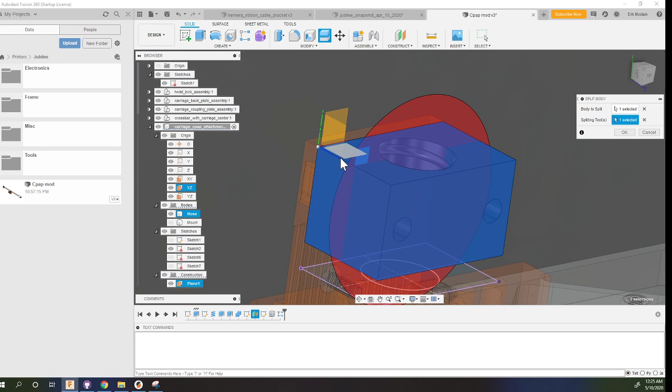Well, apparently that command doesn't work, since when I issue it on my own, I get all these failures. There we go. Oh, so why didn't that work when it's in the script? Okay. Well, I'm going to kick myself off again. I'm rebooting the box that's in stream. All right, I'll be right back.

Swear I don't remember Fusion resetting my view every single time I created a sketch. It's driving me crazy.

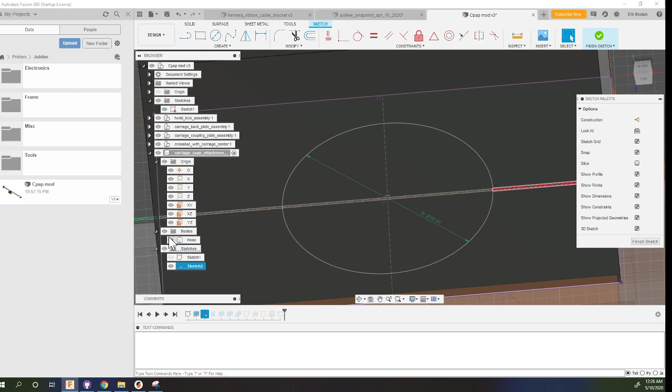Oh, hey, Daniel. Got your payment, by the way. Oh, excellent. Good. Oh, okay.

I'm back, and this time the box passes its own health check. The configuration on it is complex enough that I wrote a little tiny script that just checks everything's where it's supposed to be. It passed all the checks. I swapped out the wireless adapter for a different one, mostly because I've done some more permanent mounting in my little wiring closet, and the one I went to is physically smaller and fits better. Got it.

So I've got continuity and a resistance reading on the plug coming out of the thermistor. Right. And I wired it up exactly like I wired up the other one. Yeah, I don't think you have a wiring problem. No, because the thing is, I didn't have that resistance when I checked it at the tool board. Oh, okay. So there's a little jumper that goes between, because the thermistor's got this little tiny connector.

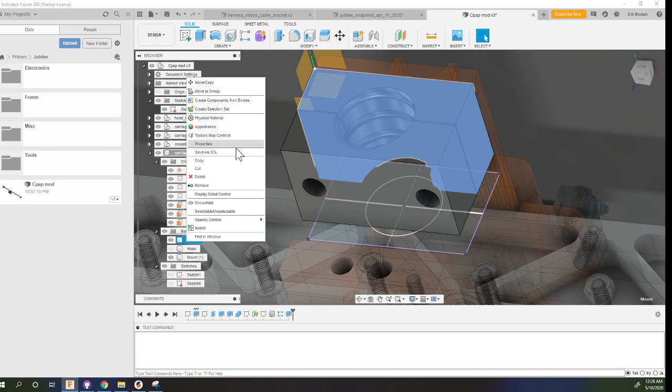I'm going to get another set of thermistors that are a single wire that don't have that little JST connector right there. Yeah, it's a bigger one too, the black one with the squeeze wings. Yeah, it's a lot bigger than it needs to be. Agreed. It's the smallest thing on the hot end, and then it has its clunky connector by E3D standard. Okay, I've got continuity there. Okay, so I think that finishes that. Okay, that's weird.

Could very well have a bad tool board, unless I've got just something wrong. Do you have a resistor? I don't remember the values, but some intermediate value will give you some reading between minus 270 and 2000. You put it directly in those pins. Yeah, that's kind of what I was thinking, just for debugging. I'll go grab 100K and I'll be right back. Yeah, 100K I can calculate. Give me 25. Yeah, roughly.